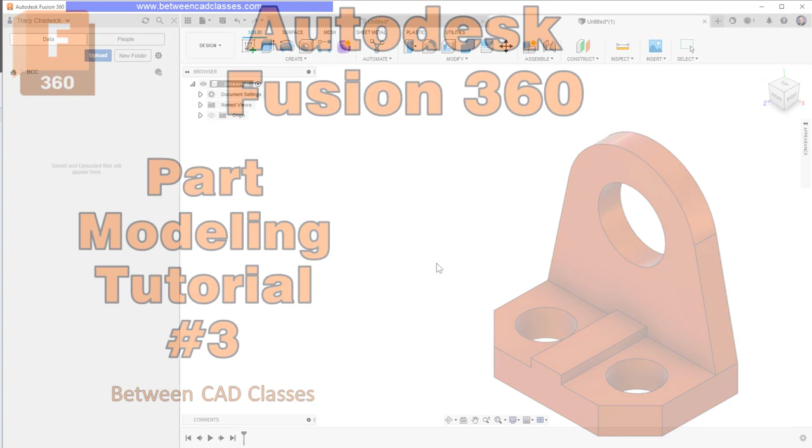First, we're going to start by creating the rectangular base feature. Then we are going to add the raised feature with the curved shape. Next, we'll add a hole to that shape. Then we will add a hole to the base.

Then using the mirror command, we will mirror that over to the other side. Then we will add some chamfers to the corners of the base feature. And then finally, we will add the extruded raised feature on the base.

Let's take a look at the detailed drawing so that we can get the dimensions for our base to start with. We can see that the base of the part is 200 millimeters wide by 128 millimeters deep, and it's going to be extruded a height of 32.

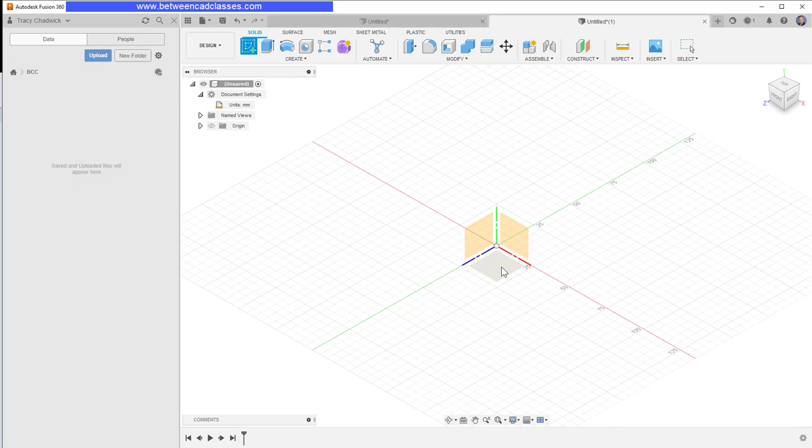Back in Fusion, the first thing I want to make sure is that I've got the correct units set. I'll expand document settings. I can see my units are currently inches, so I'm going to change my active units to millimeters. Next, I'm going to sketch, and since I'm creating the base feature, I'm going to sketch on the bottom horizontal plane here. Then I will start by creating my rectangle.

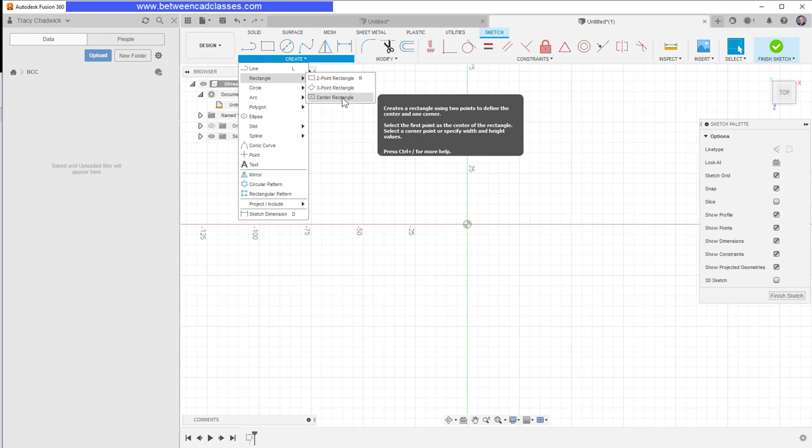I know at some point I want to mirror a hole over a middle plane, so I'm going to create my base centered around the origin. To do that, instead of using the traditional rectangle command, I'm going to click the Create drop-down, point to Rectangle, and then choose Center Rectangle. This will allow me to click the origin as my center, then I can put in my values.

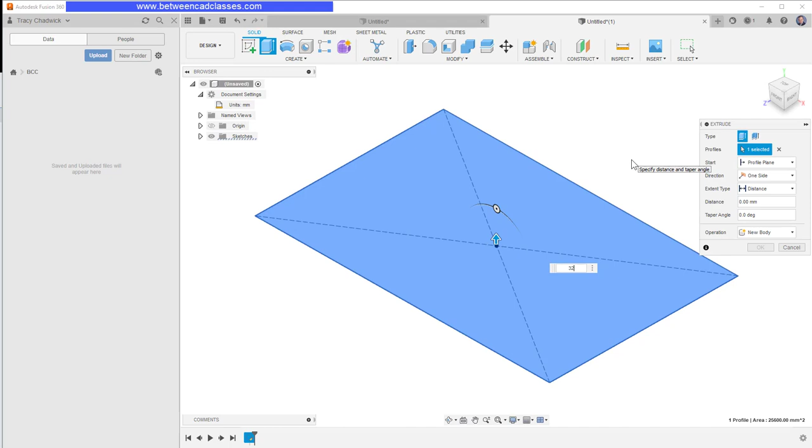So it was a depth of 128, and then I'll tab over and put in a width of 200. Then I will go ahead and finish my sketch and extrude this shape up the height of 32. And now I've got my base feature.

The next feature we're going to add is the raised feature in the back. So let's take a look at the detailed drawing again to see what the dimensions are. We can see that there's a curved shape with a radius of 76 up top here, and it is 108 millimeters from the top of the base. It's also centered above that base as well. Finally, we can see that it's going to be extruded a depth of 26.

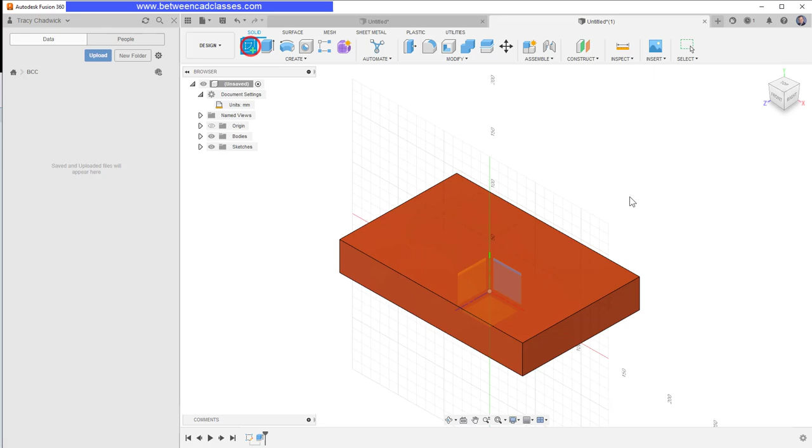Back in Fusion then, I'm going to sketch on the back of the part, so I'll revolve around and click on that back surface. I'm going to click the Create drop-down and choose Project/Include, Project, and choose this top line here so that I can use it in my sketch. Then click OK. Next, I'm going to draw the shape in arbitrarily. I'll come back and add constraints and dimensions in just a bit.

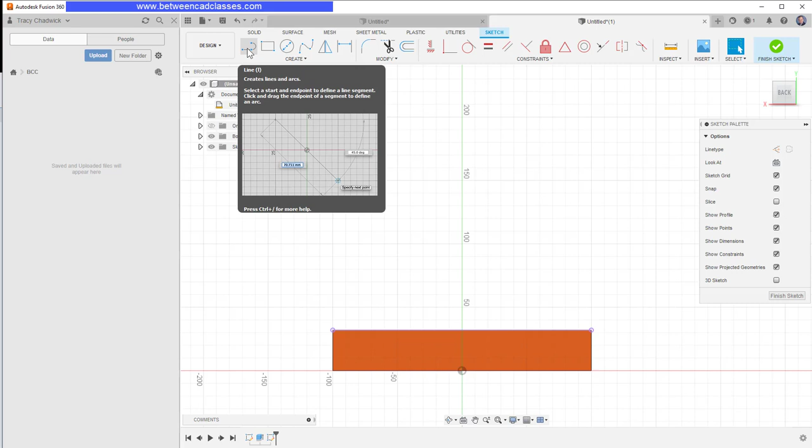So I'll start at one of the corners here and draw an angled line. Then to create a tangent arc, I'm going to click and drag off of this endpoint to make a tangent arc. Then I'll go ahead and draw down to the opposite endpoint. Next, I'll add some constraints. I can see that a tangent constraint was added here on the left side, but not the right side. So I'll come in with my tangent constraint and add that in there on the right side.

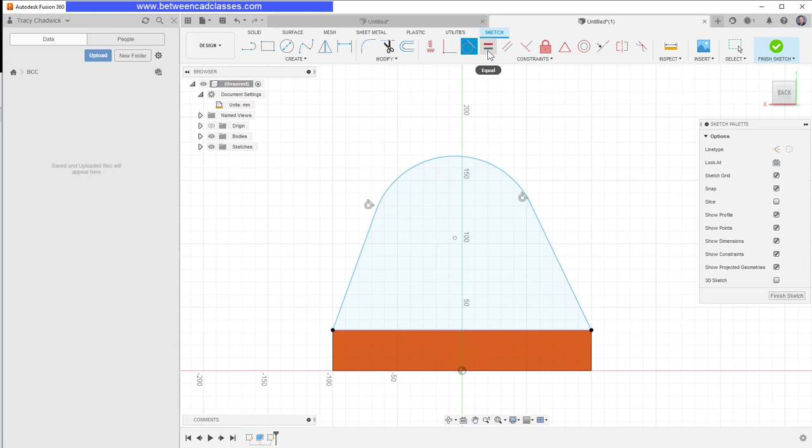Next, I want to center this shape. I could perhaps use a vertical constraint between some points, but if I make both sides equal, that will automatically pull this into a vertical relationship between the center and the shape.

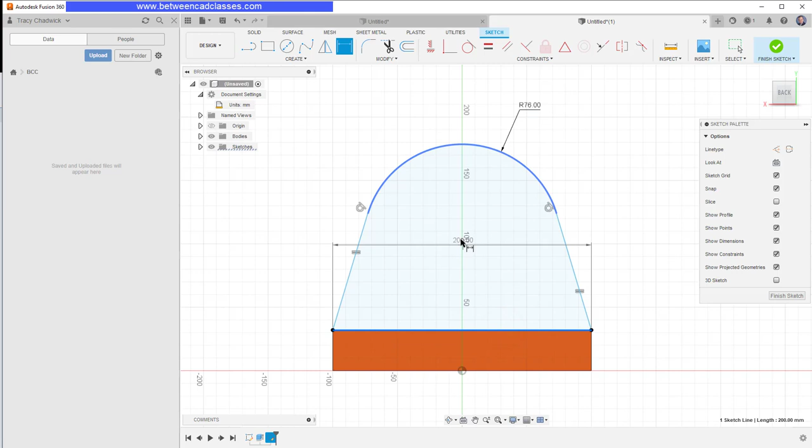Then I have two dimensions to place: the radius of the arc, which we noted was 76, and the center of the arc is 108 millimeters from this top surface. So I'll dimension from the top surface to the center of the arc, 108. Now I could draw in the circular shape here and extrude it all as one, but it makes more sense to do that as a separate feature. That way I can modify the hole more easily, or delete it or suppress it if I want later.

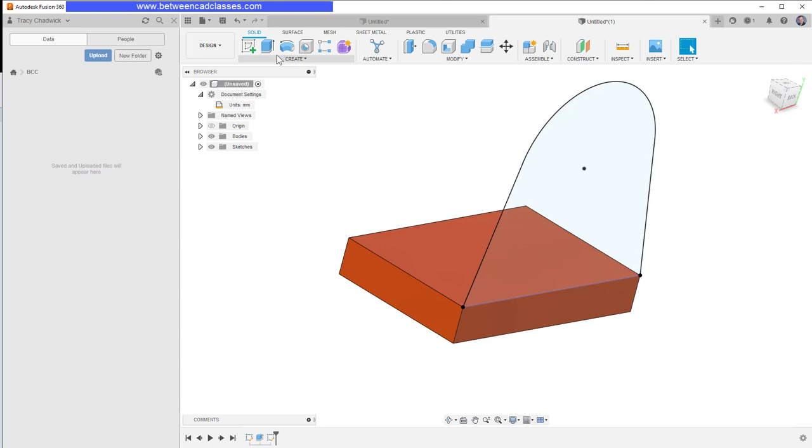So I'll go ahead and finish sketch, extrude this shape, and looks like it's going to be negative to go into the part, and that's going to be a negative 26 then for this part. I'll go ahead and click home so it'll rotate back around.

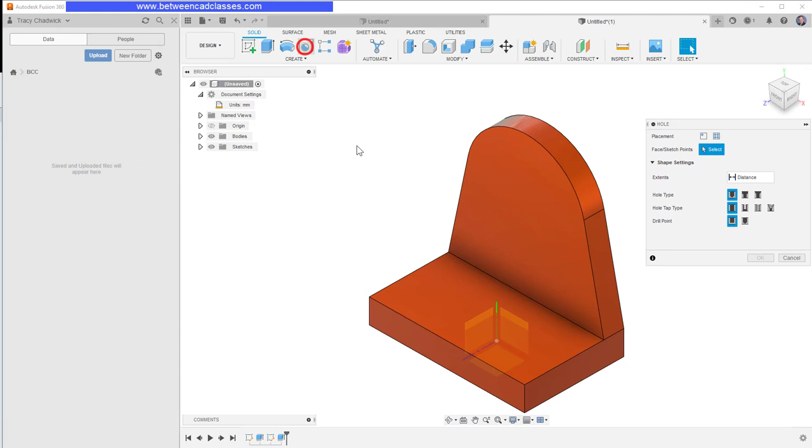Next, I'm going to add the hole. So let's take a look at the detailed drawing, and we can see that it is a diameter of 80 and it cuts all the way through this feature. I'm going to use the hole command, and to create a concentric hole, it's going to take two clicks. The first click is somewhere on the face, and the second click is going to be on the concentric reference, in this case this arc.

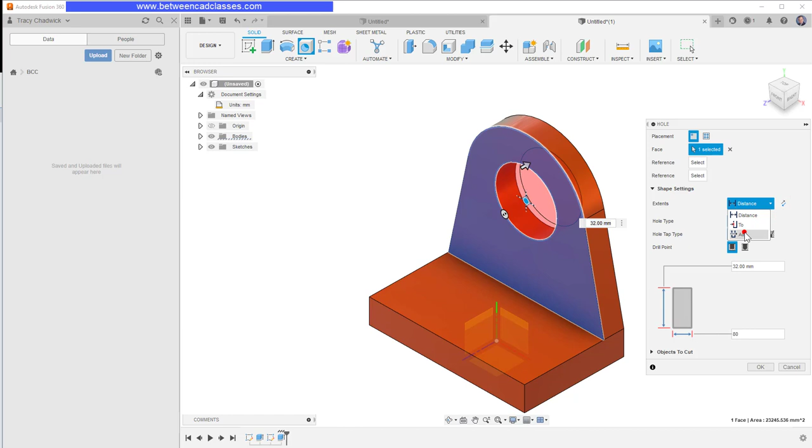Next, I can go ahead and adjust the diameter. So it was 80. Then I can adjust the depth. It's currently set to a distance. I'll go ahead and choose through all. Then I'll click OK.

Next, I'm going to add one of the holes to the base. So let's look at the detailed drawing, and we can see that there are two of these holes with a diameter of 52. They are 54 millimeters back from the front of the part, and they're in 46 millimeters from each side. And they cut completely through the base.

So back in Fusion, I will choose my hole command. I'm going to click somewhere on the top surface. I'll worry about the diameter last. I want to do my references first, so I will click the front edge as my first reference, and I will enter in the value of 54 and enter. Then I will click the second reference, the side here, and enter in my value of 46.

Next, I will come over and adjust the diameter, which should be 52. And I want to make sure that it's set to cut all the way through the part. Then I will click OK.

Next, I want to recreate the hole on the left side. I could certainly do that as a separate hole command, but mirroring it gives me a little more flexibility so that if this hole changes either size or location, the other one will update. You'll remember that I started this base centered around the origin, so I have a plane here of YZ that runs right through the middle of the part. So that is going to be my mirror plane.

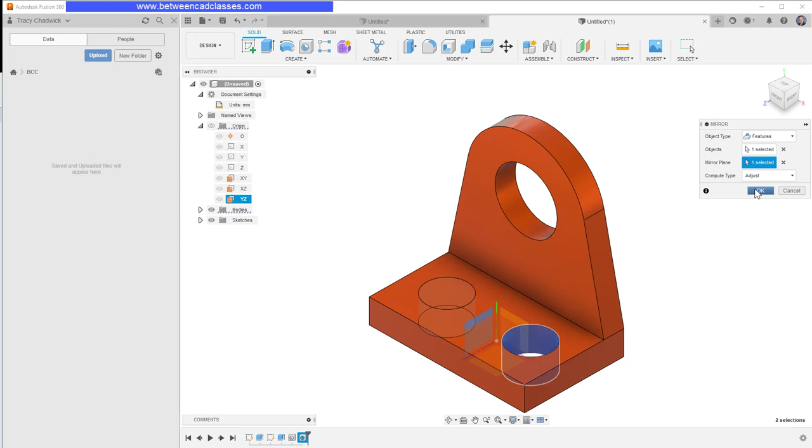To mirror the shape, I will click the Create drop-down, then choose the Mirror command. First, I need to select the objects I want to mirror and make sure it's set to features. You can see there's some different options here. So I'm mirroring a feature. I will select that feature. Then I will choose my Select Mirror Plane button, and I will select my YZ mirror plane. Then click OK. Now you can see the second hole has been generated.

Next, I'm going to add in the chamfered corners. So looking at the detailed drawing, we can see that the chamfer is going to be 38 by 38. Back in Fusion then, I'm going to use the chamfer command, which is hidden in the Modify panel. I'll select Modify, then Chamfer. I'll select my two vertical edges. Then I will enter in my value of 38. By default, it's set to the same distance each direction. So I will just go ahead and click OK.

Finally, I will add the raised extruded feature on the base. Looking at the detailed drawing, we can see that this feature is 36 millimeters wide. It's centered on the base, which also puts it 44 millimeters from the nearest chamfered corner. We can see in the front view that it is 10 millimeters tall.

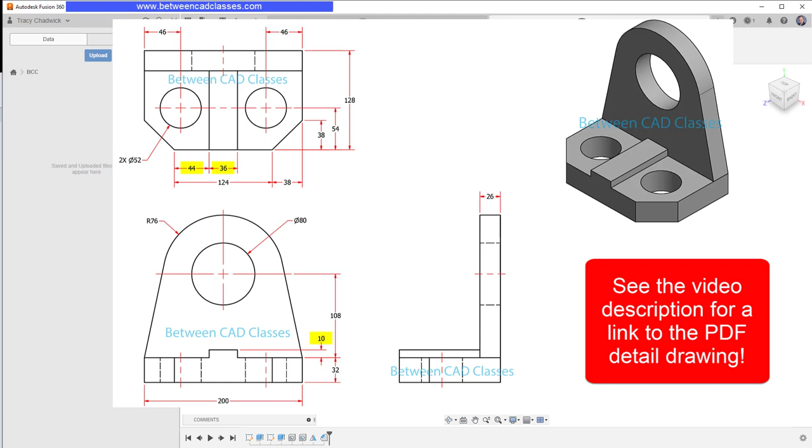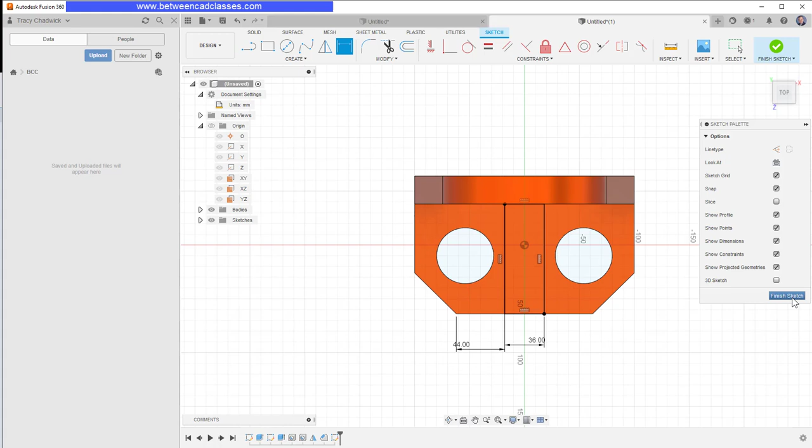Back in Fusion then, I will create a new sketch on this top surface. I'm going to create a rectangular shape, and I'll just click on each of these edges to automatically create a collinear constraint between them. Then I can add in my dimensions. So the width of the feature was 36, and it was 44 from the nearest corner here. Go ahead and finish, and extrude the height of 10, and then enter. And that completes my mechanical part.